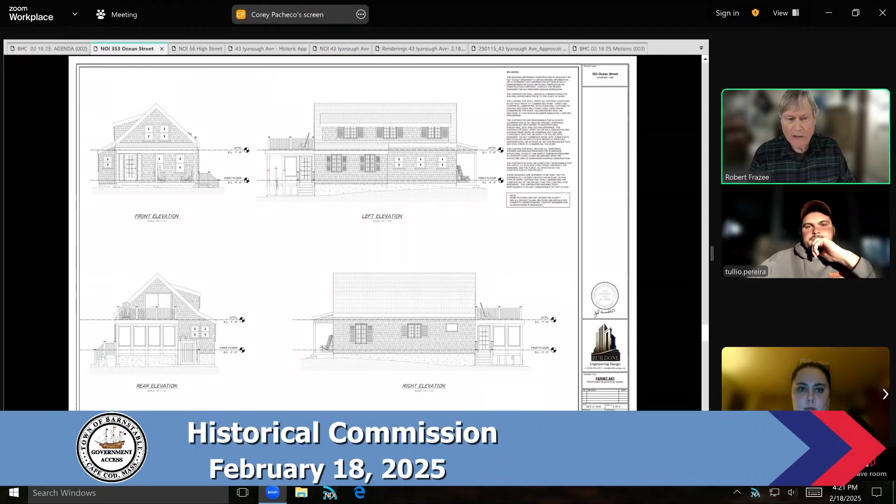Okay, thank you very much. Any other comments from the proponents to begin with as part of the presentation?

I wanted to add that, as mentioned, the house has been in my grandfather's family since it was built in 1846, and my husband and I inherited it through my mom. One of the other things we're going to do is a major mitigation of all the invasive species near the marsh, so we can reestablish native planting. We're trying to heal the abuse that happened after my grandfather's death until we were able to take possession, and we're excited to preserve it for our kids and beyond, and to work with Tullio to get it back to healthy use.

Okay, thank you very much.

I just realized I am remiss as chair not to have formally opened the public hearing, and I apologize for that. I don't think any harm is done here, but I would like to request a motion to open the public hearing. I move that we open the public hearing.

Nancy Shoemaker, thank you. Is there a second? I'll second that. Thank you, Jack Kay. It needs to be a roll call since it's a Zoom. All in favor of opening the public hearing: Nancy Shoemaker, aye. Jack Kay, aye. Barbara DeBiase, yes. John Richmond, yes. Robert Frazee, yes. Thank you all for bearing with me.

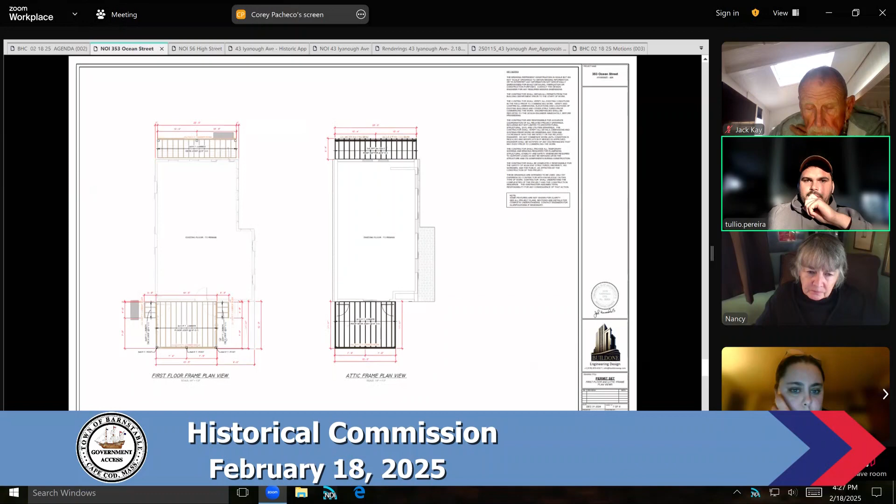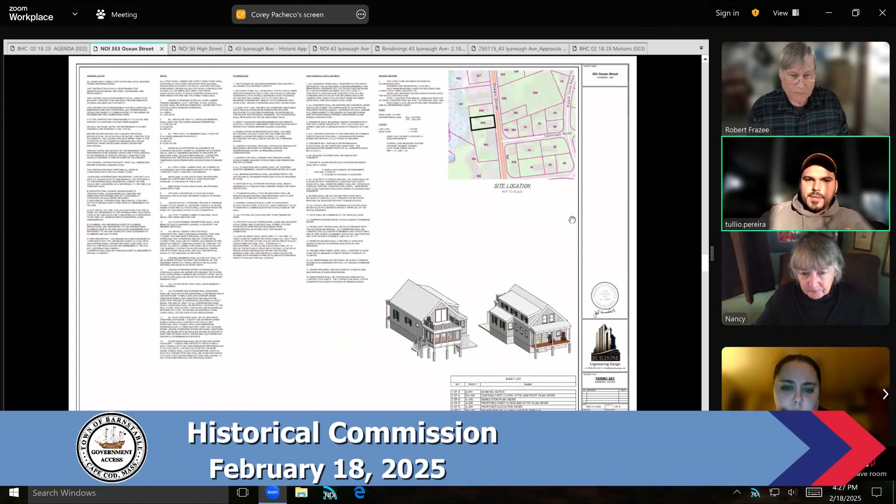The drawing should be, let's see, under that, keep scrolling down because the engineer put it right there. I don't recall seeing an illustration showing a major siding change with the application. So keep rolling down. That still looks like it's shingles.

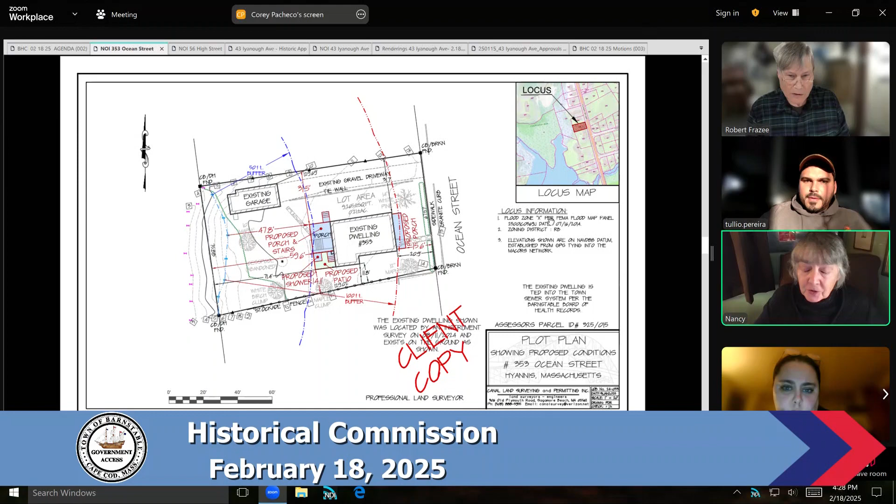Also my other concern was, if you're updating the siding, trim, windows, doors, and roof, what kind of material are you using? Because it's an 1846 house, and it does look like it has an awful lot of original or near original facade. Can I just jump in and say that my grandfather got possession of his house in the 80s after his parents passed and the renters moved out, because his parents lived down the street.

So it was just the white siding. All he did was say, I want it to look like it did when I was born in it, and so I'm going back to the cedar shake stuff. So my point is that he himself did a complete remodel for his tastes, and he was very much dyed in the wool Cape Cod.

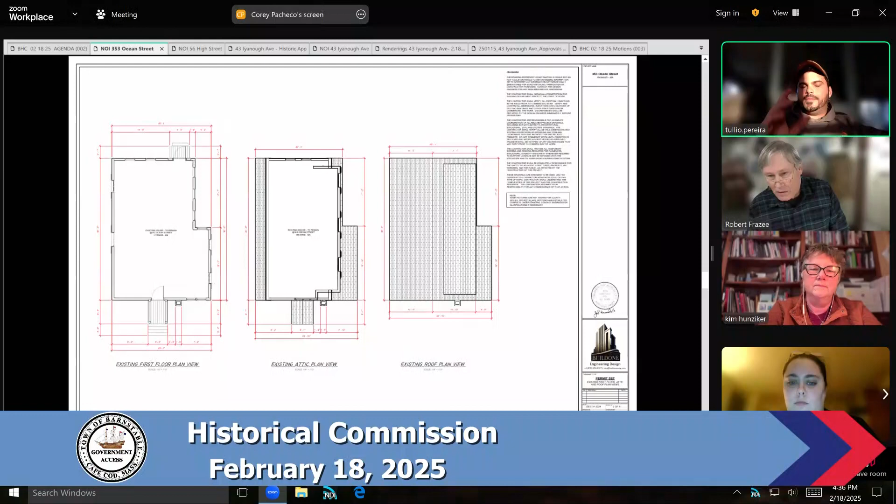Do you mean like an architectural drawing of the siding as you'd have it? So the same drawing as it is now from the engineer, but applying the vertical boards, the Hardie board, instead of the shingles? Do you want it to be like a painting of it, or a drawing?

Jack, correct me, but I think drawings such as the ones on the screen right now would be adequate, maybe with a focus on some interface between the Hardie board and some of the trim that Jack has raised a question about, maybe principally on the facade where we have ear boards and returns and things from the rake boards. Those will be areas where we'll know how it will look and how it will work.

Just one question, as far as functionality, I can always have an architect draw it, take out the shingles, put the vertical boards in and all that. But as far as functionality, did you want me to get James Hardie's ways of installation or something like that to present to the table? Is that what we're looking for here?

Jack, do you think that's needed? I'm not the architect, you are. No, I don't think that's needed. I think what we're looking at right now with vertical siding will help us greatly, but right now it almost appears like it's still shingles. Yeah, it does. I think so. Does that help, Tullio? Does that help you understand what we're after?

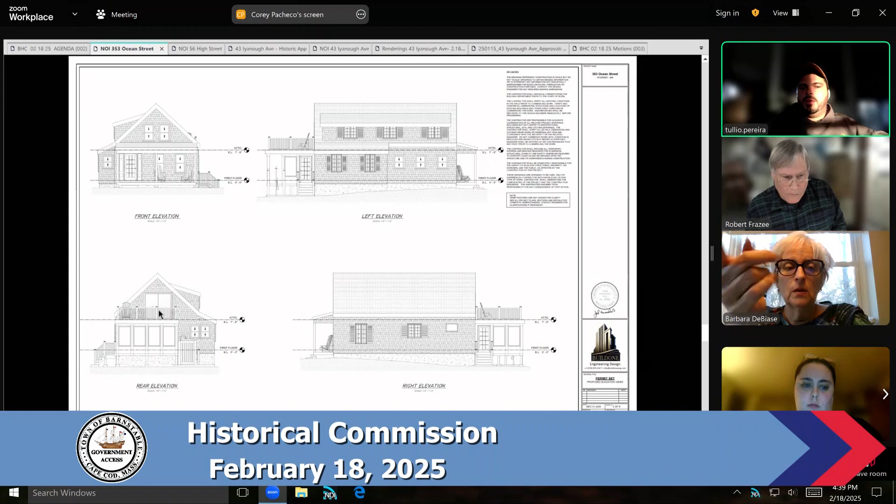So underneath where your arrow is pointing, are there 4 windows there? Underneath is 3 windows, and they're gonna become a slider according to the plan, if possible. But the windows are huge. It's pretty much the same size as the slider.

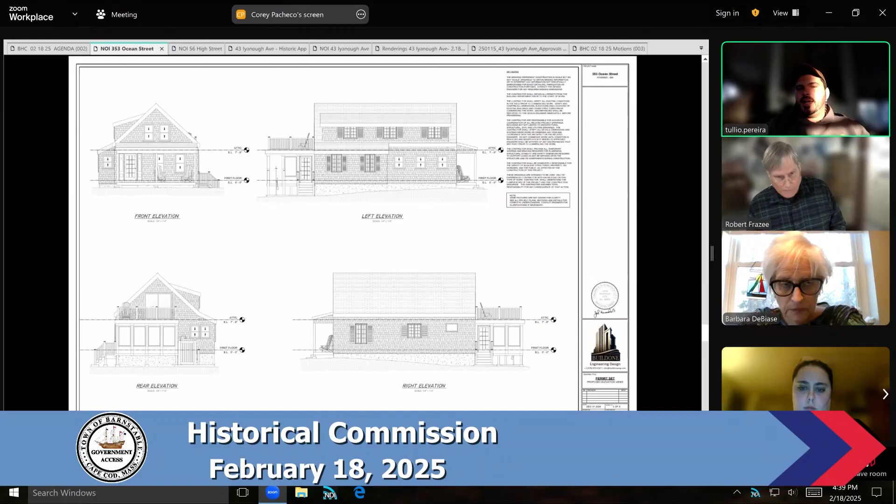And beneath that, are there 4 windows there currently? No, that's the back side. Beneath that is the finished grade after we add the porch in the back. Right now it's just that entrance with the exit door to the backyard. I see, okay.

That will be a screen, interchangeable screen with glass porch. So it'll be like a porch right there. You'll see a larger 16 by 12 area there, and this will disappear, the little doghouse entrance will disappear, and that will come out and become the three-season porch.

Thank you. The back of this house looks like it has casements above that back porch. Is that correct?

I'm sorry, what was the question? Kind of echoing. Jack was asking, it appears to him that the windows in this elevation shown on the screen right now incorporate casement windows. Is that correct? The top windows?

Yeah. Yes. I agree, it looks like that, and they will become sliders, the slider that I was mentioning earlier.

Again, I don't have any problems with the back of the house, but even if it was vertical boarding, I wouldn't be very thrilled with that. But it's just such a charming house. It has not appreciably changed in close to 180 or so years. I hate to see it suddenly become a totally different building. I'm also wondering, there's somebody echoing here.

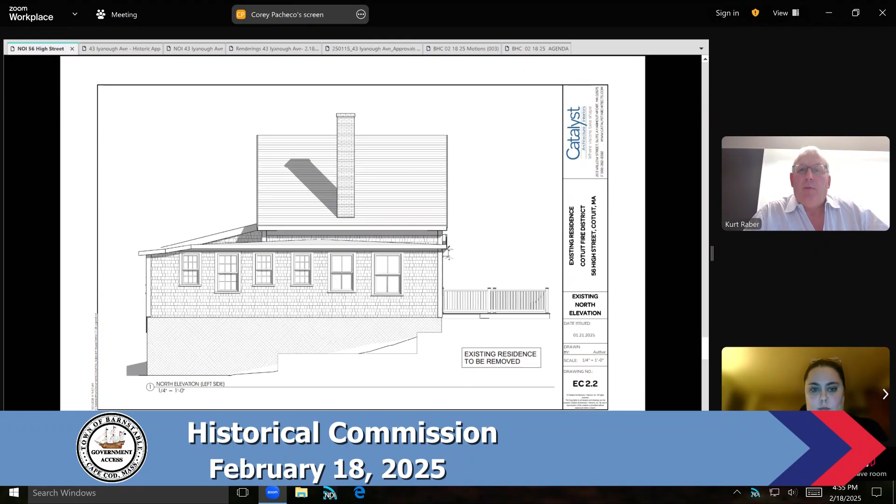We didn't feel like that structure had the same historic significance as what remains of the center portion of that old house. So I'll stop talking and try to answer your questions.

Great, thank you very much, sir. I appreciate that. Commissioners, any specific questions? Are there people from the community who would like to speak? That's a very fair question.

Erica, you see anybody? This is Erica Brown. There are quite a few people on, so if I'm missing somebody, please feel free to unmute yourself, but I do not see anyone wishing to speak to this item at this time. And am I correct also that we had no written public comment on this application? Correct, there was no written public comment.

The only other ingredient I would toss in, and Erica, you can help me out with timing of it, but this property, this building, was the subject of an application previously before the Barnstable Historical Commission, at which time it was considered preferably preserved. A demolition delay was imposed. One of the objectives of the delay was to enable exploration of an opportunity to perhaps move it to a not terribly distant property.

I understand that there had been an individual interested in receiving it, which supported that idea, and that consequent to the demolition delay being invoked, it was determined that there was a zoning obstruction to the move and it could not be fulfilled. And that the filing remained open and expired, basically. It was not demolished, and that's one of the reasons this is back as if a fresh application.

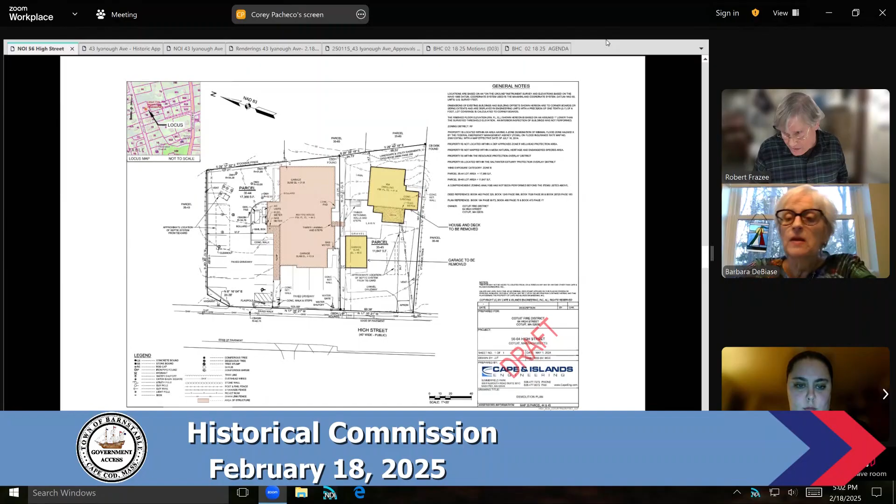We'll have a roll call vote. An aye vote will impose an 18-month delay, a nay vote will not impose an 18-month delay. Nancy Shoemaker, nay. Cheryl Powell, not here. Jack Kay, nay. Barbara DeBiase, nay. John Richmond, nay. Robert Frazee, nay.

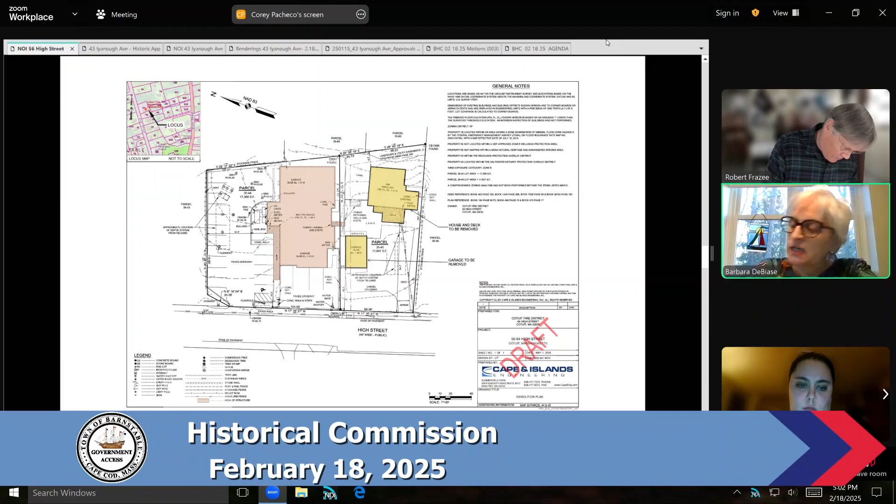All righty, moving down to the next motion, which would be if motion 1 fails. Barbara: I move that in accordance with section 112-3F, the Barnstable Historical Commission determines that the full demolition of the building located at 56 High Street, Cotuit is not detrimental to the historical, cultural, and architectural heritage or resources of the town. The second? Nancy Shoemaker, I'll second it. Thank you, Nancy. An aye vote determines that the full demolition of the single-family structure is not detrimental and no demolition delay would be imposed.

Nancy Shoemaker, aye. Jack Kay, aye. Barbara DeBiase, aye. John Richmond, aye. Robert Frazee, aye. So there's no demolition delay imposed and you are free to proceed with your demolition permit for the building inspector. Okay, thank you very much. Thank you for your time. Appreciate it.

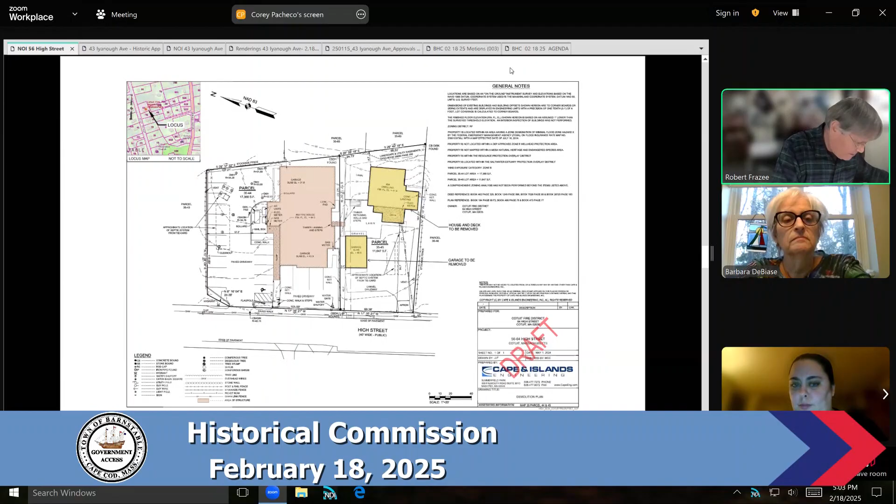Duane Friedman and Catherine Friedman, trustees, 43 Iyannough Avenue, Hyannisport, map 287, parcel 074, built 1880. Partial demolition: existing dwelling to be raised and set on new foundation and renovated to preserve original portions. Construct new additions, including an attached garage. Update windows, roof, and siding. Full demolition of the existing detached garage, built in 1935. I'd like to open the public hearing for this.

Could I have a motion to do so, please? Nancy Shoemaker: I move that we open the public hearing. Thank you, and a second? I'll second that. Okay, thank you very much. All in favor: Nancy Shoemaker, aye. Jack Kay, aye. Barbara DeBiase, aye. John Richmond, aye. Robert Frazee, aye. We are in public hearing for this, and again, thank you to those of you who have been waiting to be able to speak to us.

Please identify yourselves and let us hear what you have in mind. Is there someone here to speak for this applicant? This is Patrick Ahern, architect.

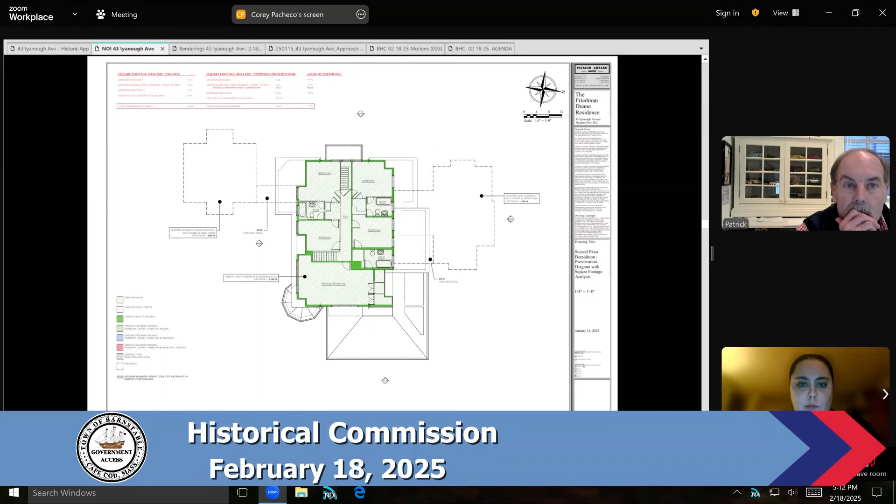I think that would be the one, Erica, that was sent today. Just the one you want, Patrick? Well, these are fine, but I just want to go back to this right after. Okay, so which one do you want? I'd like that drawing that shows the existing elevation on the upper portion of the page and the proposed at the bottom.

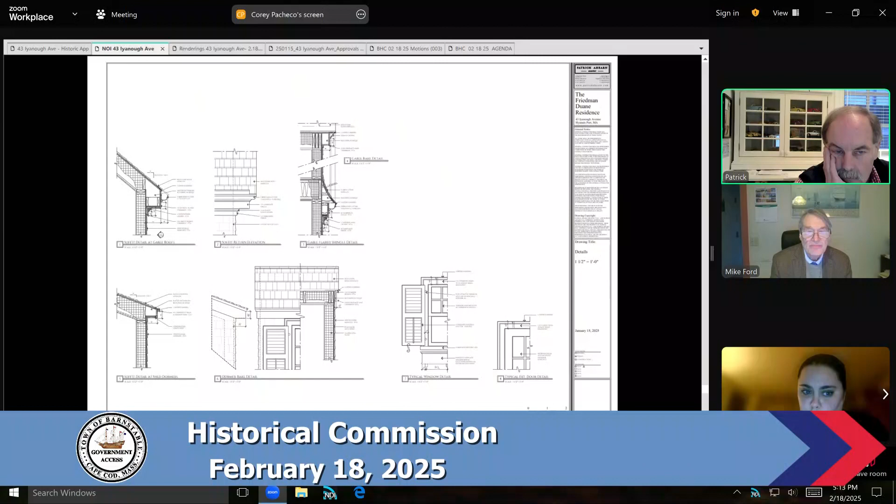Keep going. Going. Keep going, please.

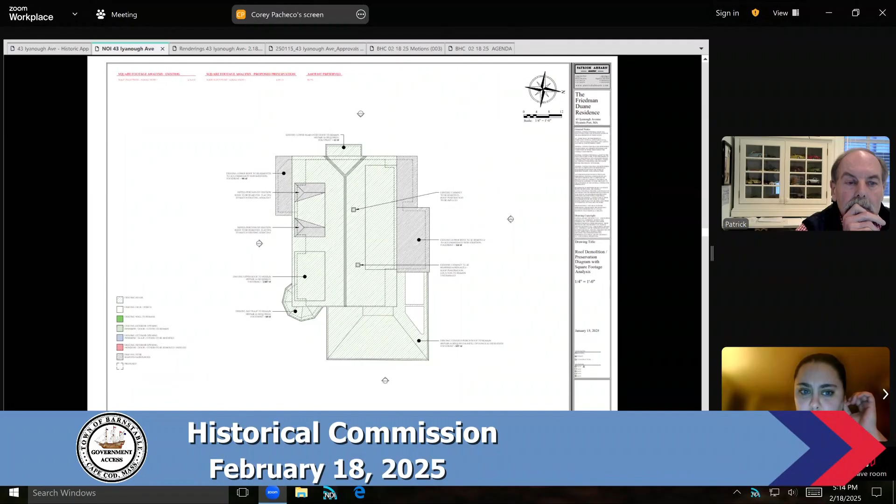Unfortunately, Patrick, I don't think we had a drawing that showed both the existing and the proposed on the same page. Oh, you know what was submitted? Do you have it, Patrick? I have it here in front of me. Well, maybe if you put it up.

Could you share, Erica, so that he could put it up? Sarah, would you be able to allow Patrick to share? It looks like he has it electronically. It looks like he literally just has a piece of paper, so. Well, I can do it this way, I guess.

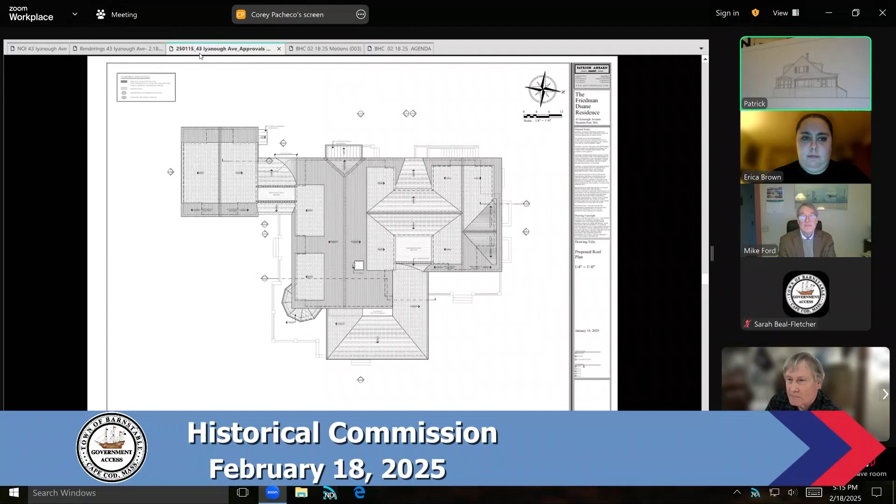So if we could go to those renderings in your packet, that might be helpful. Let's start slowly. The garage wing is set back 45 feet, and the other wing is 20 feet back, and basically the same massing of what's existing now is still there, including the bay windows and the covered porch, albeit without the vinyl siding. It would be a wood shingle roof, white cedar shingles, stained white, which the house has been for many years with the vinyl, unfortunately.

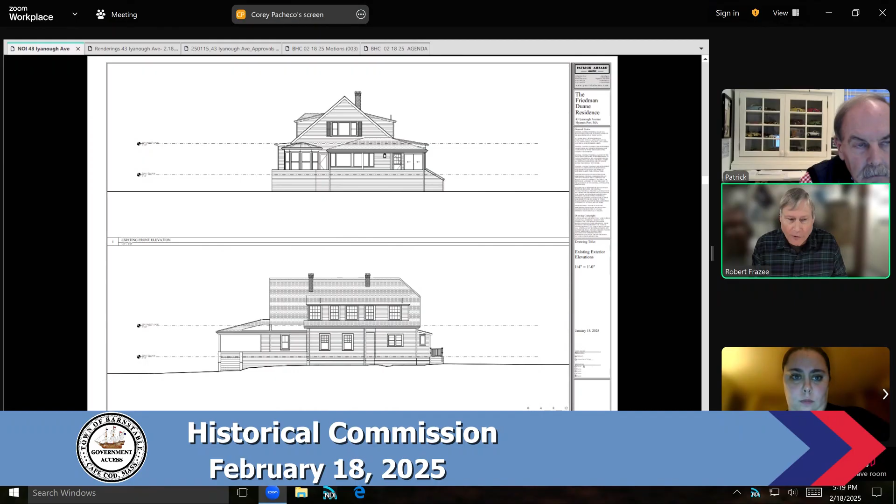Thank you, Patrick, very much, and Mike also. That was very helpful. The plans are awesome from a study point of view for a commission like ours. I know that's part of your plan, and I appreciate that. Thank you for consulting with Sarah Korjeff first and on site as well. I don't think the commission was aware that you had done that, but it's certainly recommended when a building is in a National Register district and stated as contributing, and when the alterations to the overall program are as substantial as they are, let alone whether there's a substantial alteration to the original structure.

That's a separate matter. But coincidentally, we had a training session an hour before this hearing, at which Sarah presented on the topic of historical commissions' referrals to the Cape Cod Commission. So we're a little better warmed up on the subject than we would normally be. One of her comments was that historical commissions frequently reach out for her expertise, in particular when a partial or complete demolition is being requested. So there's a certain synergy here, which I appreciate. I'm hoping we may not need to reach back out to her, and it's very helpful that you already have.

We also met with the building inspector to make sure we were preserving the appropriate percentages and that it didn't trigger any other issues. So we really did our homework and wanted to make sure your board recognizes that this wasn't a first cut, let's see what happens approach. This was very carefully crafted and studied to make sure we were within the purview and guidelines of your board, but also reached out to other players that would have some influence on the review of the design.

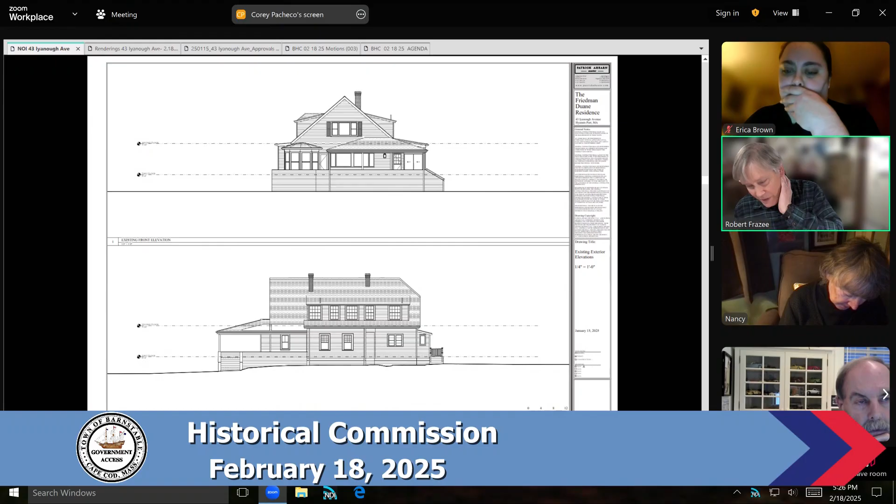Good. Jack, we're going to go to the public comment section, but I wanted to ask you as a commissioner and an architect, your impressions and thoughts based on the presentation and the plans and hearing of Sarah Korjeff's interactions, which are very helpful to have up front here. Well, I think the proposal is very acceptable. Okay. Yeah, it's nicely thought out and preserves a lot of what we want.

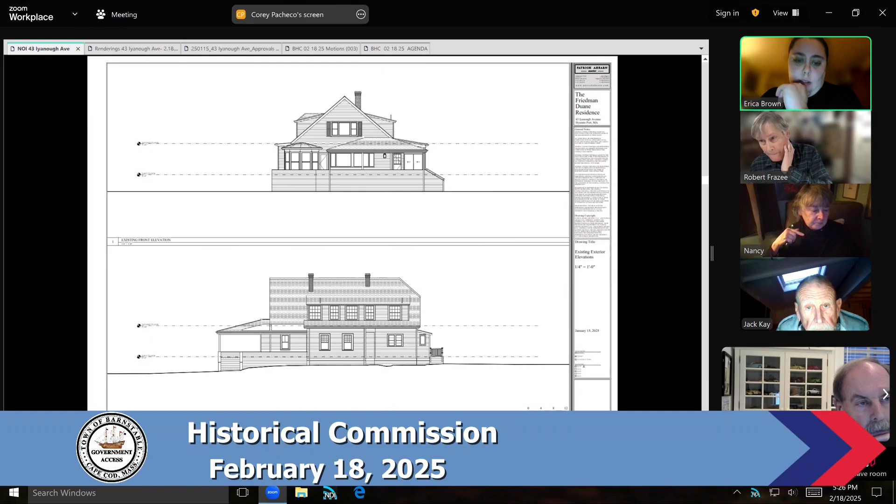Very good. Erica, how would you like to handle the public comment question here? You want to read some of the last 5 that came in that we think perhaps people did not see in person? Does that make sense? I can do that, just give me a couple of seconds to bring it up. And then certainly if there are those in attendance who wish to speak to the subject, they're in a moment going to be most welcome to do that as well. I want to.

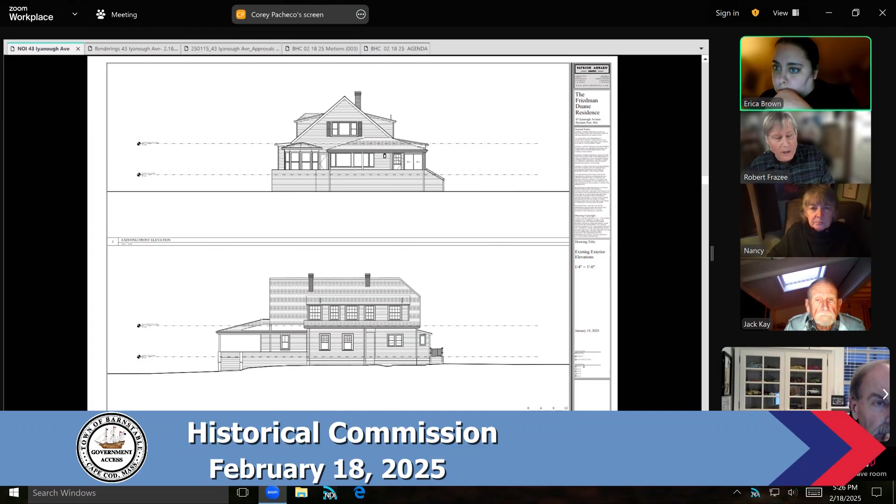I want to say, while you're looking at that, my impression of the comments was that they were predominantly in opposition, and predominantly concerned with scale and massing—not so much the on-site question as self-contained, but how the alterations to the programming on the site relate to other properties in the immediate neighborhood. I may be mistaken, and don't mean to put words in anyone's mouth, but that's my summary of the preponderance of communications that came in early enough for us all to see. That was it—let's hear some of the other ones now.

Yeah, I had 5 submitted today, so we'll round out and do all 5 in case not everybody got a chance to look at them. I just need to open up one more on my screen—give me two seconds and I will read them into the record.

Mr. Chairman, Mike Ford—I'll tell you that we have not had the opportunity to see any of the letters.

Okay, they're all uploaded to Laserfiche, just so you're aware—about 5 of them on Friday, and then 5 today. If you'd like, Mike, do you want me to read them all in? No, that's up to the chairman. I don't have a problem with whatever the board decides about reading them in—I just wanted to let the commission know we hadn't seen the letters. No, I appreciate that, Mike, but as chairman, I'd be more than happy to have Erica read them if it makes you or your client more comfortable. No, okay, you make the decision—that's fine.